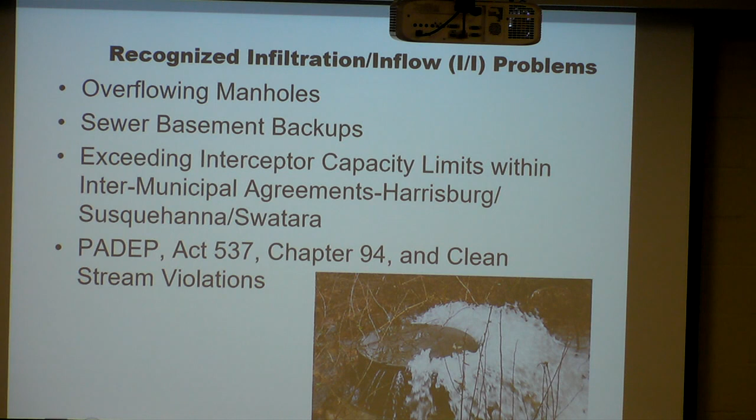A little bit of history: while recognizing the infiltration inflow problems, we first recognized overflowing manholes and sewer basement backups. We exceeded interceptor capacity limits within the intermunicipal agreements for the city of Harrisburg, Susquehanna, and Swatara. At that point PADEP provided notice that we were in violation of Chapter 94 in the Clean Stream laws. This was back in 1995.

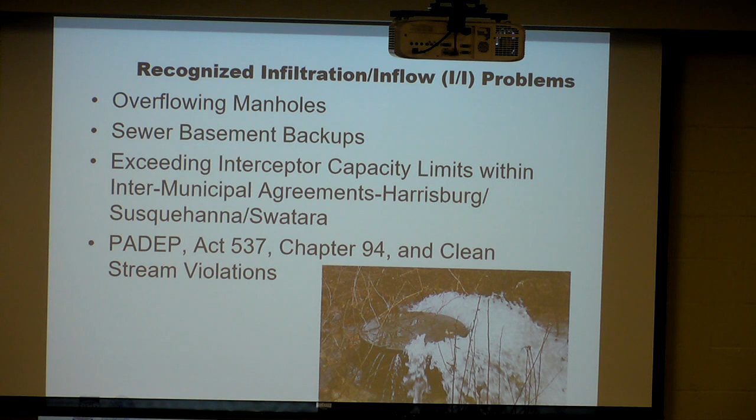So as part of the consent decree, this amendment was done in 2002 for a total replacement program. The program includes replacing all asbestos cement pipe that's reached its useful life from 1972 and clay sanitary sewers that have reached their useful life from the 60s. We also test and replace or repair PVC sewers that fail an air test and are contributing unacceptable amounts of flow, including private sewers. This includes all the project area we're discussing today in PC3E Claremont.

This is the PVC area public meeting. These sewers in PC3E were metered and showed excessive I&I, which is the reason it was included as part of this program.

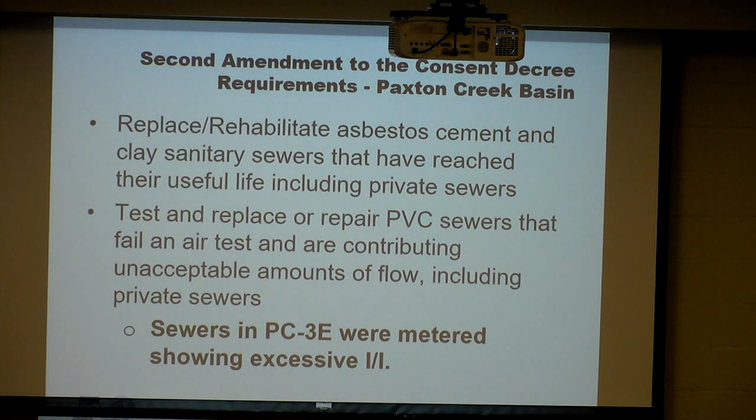So the goal is to eliminate overflows and basement backups by 2022 in Paxton Creek, and we also have to reduce the sewer system hydraulic overload by reducing the flow in the system so that it will properly function without the threat of sewer backups and overflows.

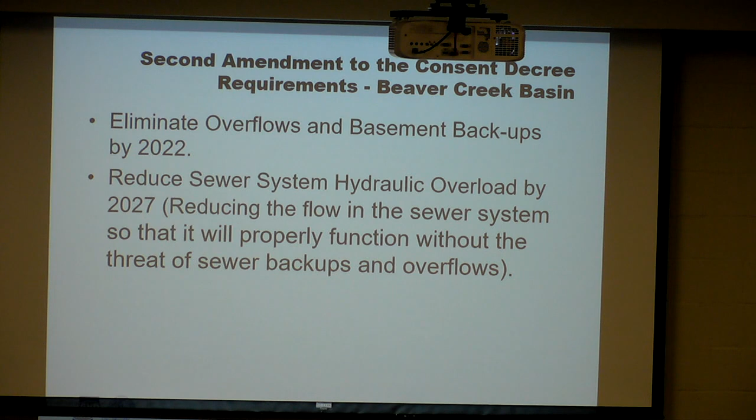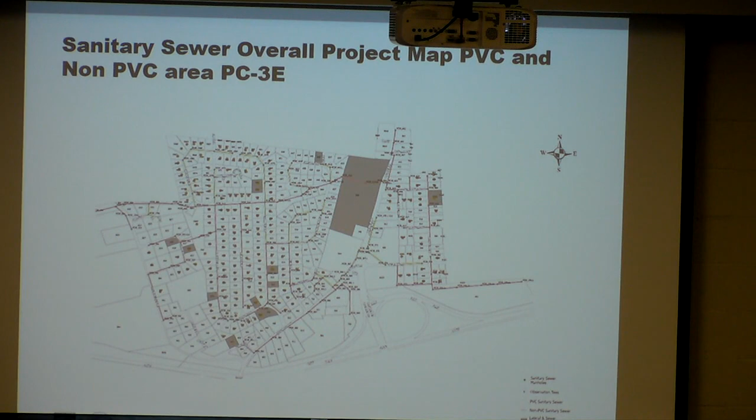This is just an overall map of the project area. For those watching today that haven't been able to attend the public meeting, this is obviously your neighborhood, Claremont. There are 138 homes within the PVC area. This overall map shows all of the PVC and non-PVC areas, with approximately 400 plus homes in this area.

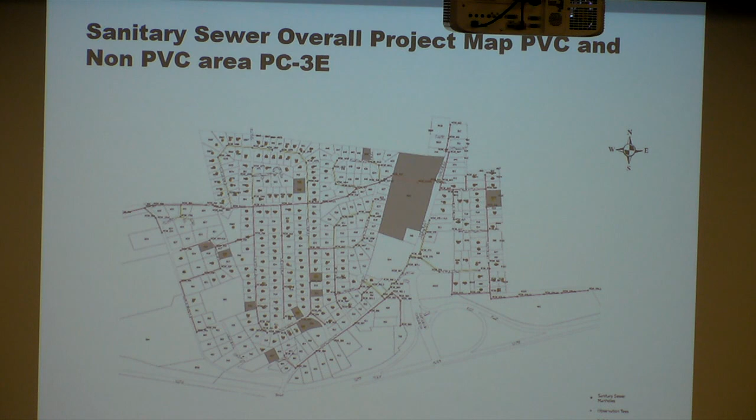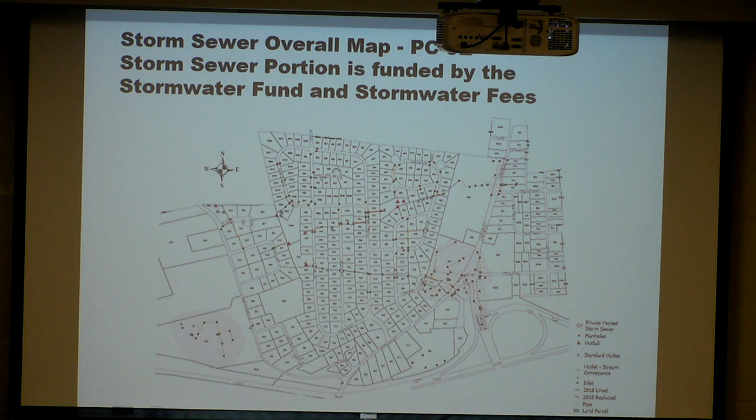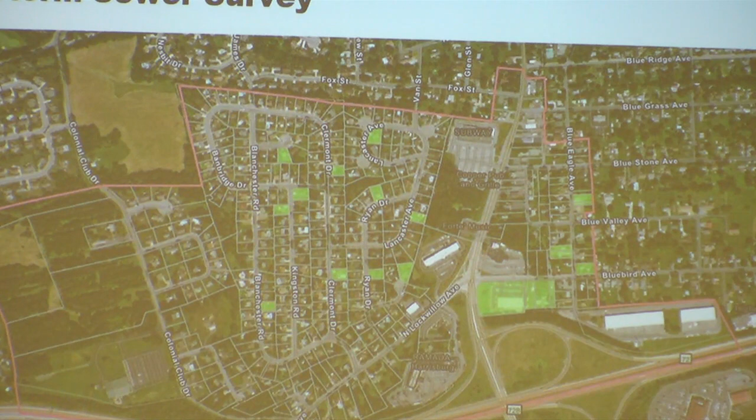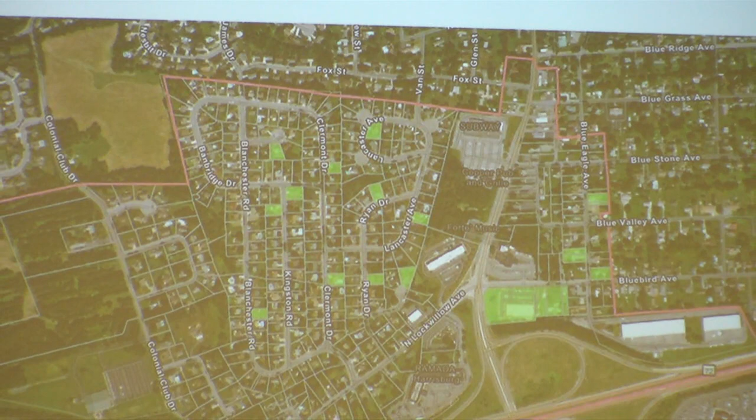John, you want to take these? Sure, Bill. The storm sewer surveys that were sent out are in advance of the private sewer agreement that you received most recently in the mail. To date, we have about 15 returned. We encourage everybody to return them to us, and we will be reviewing them here in the next month and a half to include expanding some of the storm sewer system in areas that we know are having issues as reported by any resident who returns the survey.

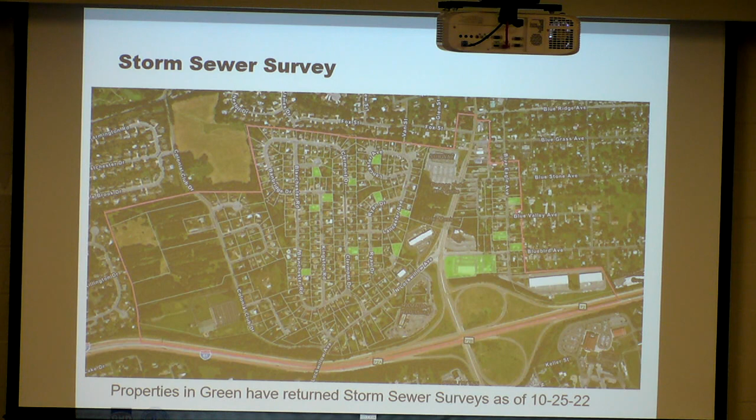This is the map showing all the areas that have returned surveys, highlighted as green properties. We encourage everybody to return them to us via email at mynewsewer.com or in the mail to the address listed on the top of the survey.

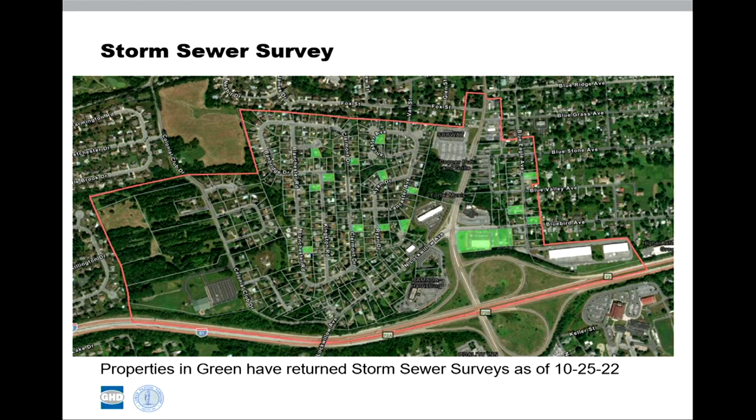A little bit about the project milestones for the public sewer, private sewer, and public storm sewer system: our first milestone is what John just said. We mailed out the storm sewer survey in October. We'd like to get those back in November and start the design of the public sewer and storm sewers.

The design of the project will last all through 2023, and we will bid the project in November 2023, award the project in December 2023, and have a construction meeting in February 2024. In March 2024 we expect construction to begin, and the project will last a year and a half, until the end of 2025.

All storm sewer work for this project will be completed by the Township storm sewer replacement crew, which we started in 2022 and realized a savings per year of $200,000 to $300,000. That crew will start that work in November 2024 and go until the end of 2025. The total project cost, including sewer and stormwater, is approximately $17.2 million.

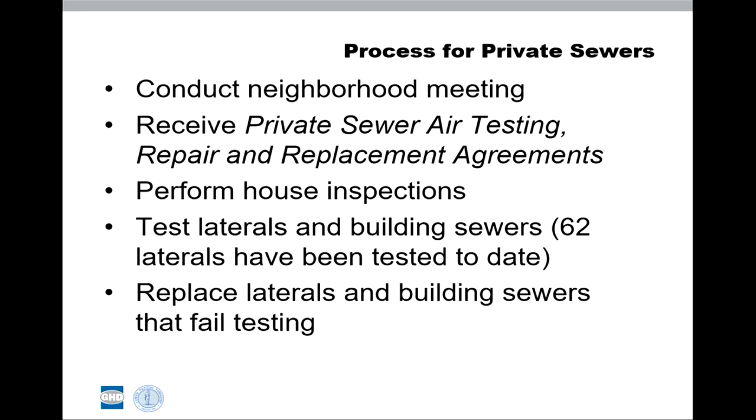Then we replace laterals and building sewers that fail testing. Then we restore areas affected by construction. Yards will be hydroseeded by a subcontractor, and concrete will be repaired by a subcontractor.

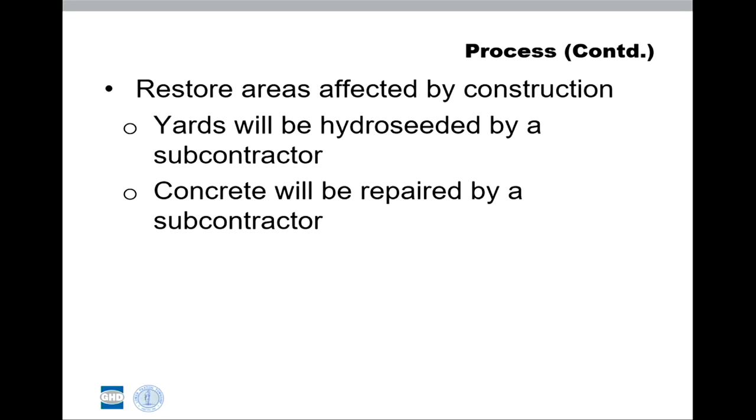More about the schedule milestones: we'd like to get the agreements back between now and November 2022 to January 2023. Building inspections will be done January to March 2023, then a crew - the same crew that does storm sewer work - will come in April 2023 to start testing and replacing private sewers. This is 138 properties. There's 62 that already have a clean out, which I'll show next. That work will take from April to November 2023, with final completion in November 2023.

This is a typical sewer layout we'd like to show. Most folks don't really see the sewer in the ground and don't understand the components. The homeowner's responsibility is everything from the house to the main line in the street. This includes the sewer lateral portion, which goes from the sidewalk to the sewer main.

If you don't have a sidewalk, it's usually the grass area at the edge of paving to the middle of the street - we call that the sewer lateral. The building sewer goes from the house to the sewer lateral. That's typically 4-inch, and the lateral is 6-inch. In between, there's a service connection point we call an observation tee.

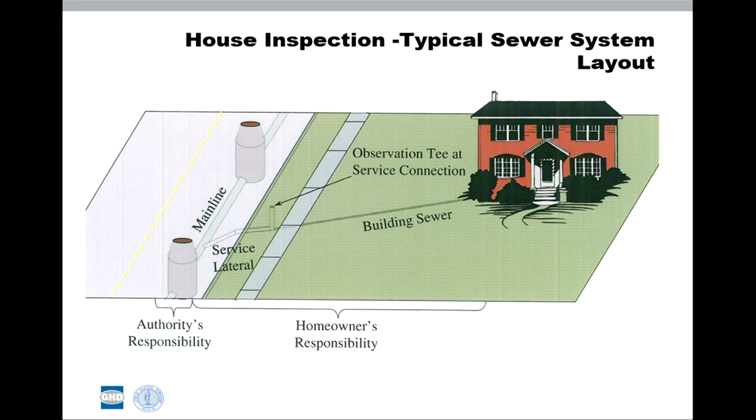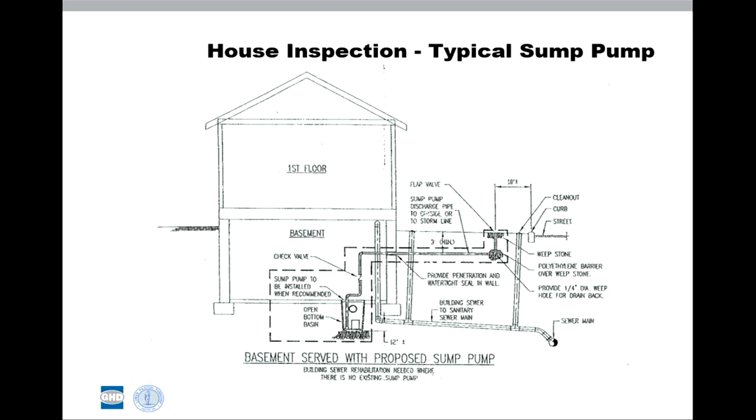As part of the house inspection process we went over earlier, John Dibler will be out to do a house inspection, scheduled either at the public meeting on the 17th, or if you're watching this video, you'll need to call our office to schedule one. This is to make sure you have a typical sump pump with a typical connection that shows it's not connected to the public sewer, but discharges to a weeping area in the yard, into a pervious area, and not into the public sewer or storm sewer system.

So what kind of disruption can be expected during construction on your property? This is the contract spec provided in the contract document - what you can expect if your sewer fails an air test. You'll have your sewer line replaced, and these are the components.

It's pretty straightforward. As I said earlier, the building sewer is 4-inch, and out toward the street there's a T-tail for the lateral, which is 6-inch. We have the observation tee that connects the two with what we call a 6x4 reducer. So this is what to expect if your sewer fails an air test and needs replacement.

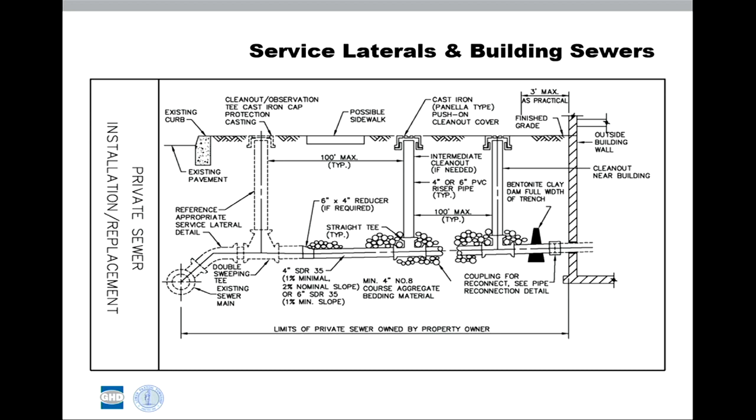We'll talk about air testing now. First, we'll air test the sewer. If you don't have an observation tee, we'll have to install that first, usually between the curb and the sidewalk. If you don't have a curb or sidewalk, it's the edge of paving. They'll put in the observation tee, insert a plug, and insert a plug at the house through the clean out.

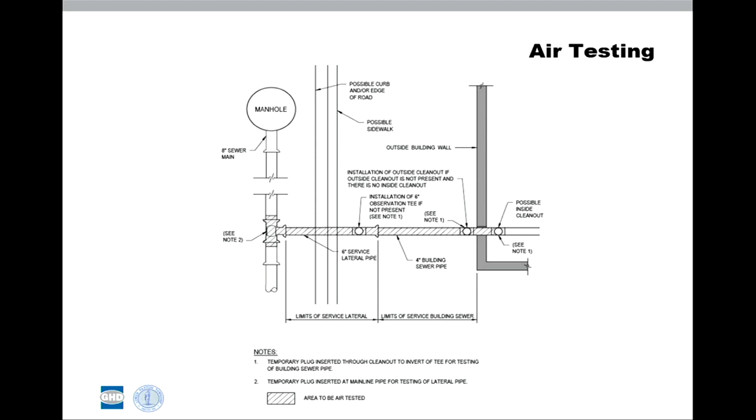So there's a possibility you could have sections of your sewer pass and not be replaced, or you could have both replaced, depending on the testing.

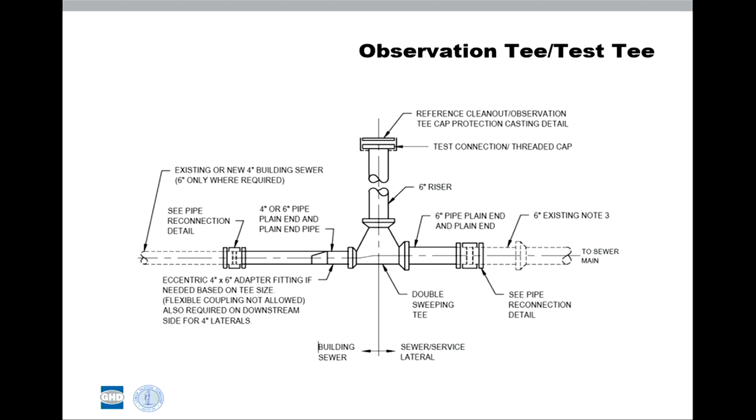This is just a typical spec detail for the observation tee itself. Some of you, if you're lucky, will have the sewer pass for both the lateral and building sewer, and you didn't have an observation tee. This would be the only spec detail given to our folks - just the installation of that connection point - and for testing, it's called the observation test T.

At the observation test T, we put a casting. Some of the older sewers have a PVC clean out that's buried, and if it's not buried, it's often hit by lawnmowers. So we've come up with a typical casting that won't be damaged. It's set at grade when finished.

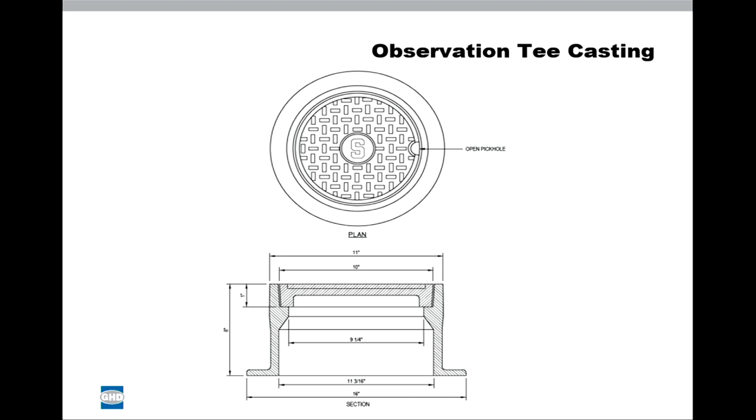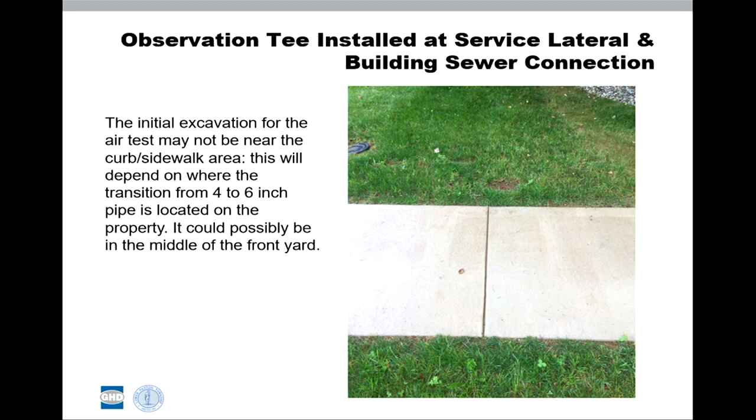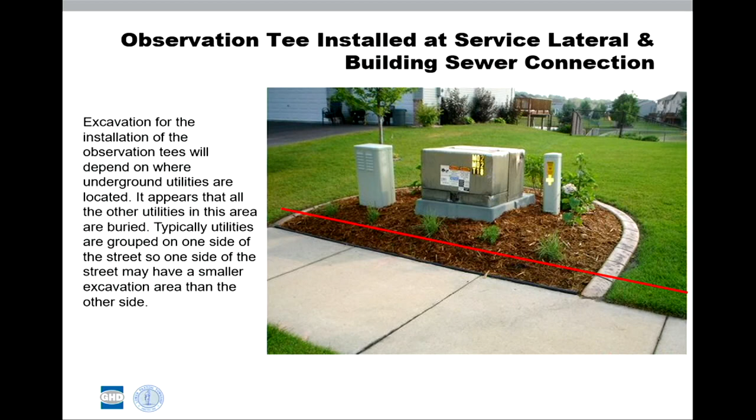This is just to show the excavation for the observation tee, which will depend on where the underground utilities are located. If other utilities are buried in this area, we may have to move the observation tee closer to or away from the house due to conflicts with Verizon, electric, or water. The red line shows where the observation tee should be, but if there are utilities there, we'll move it a couple feet either way.

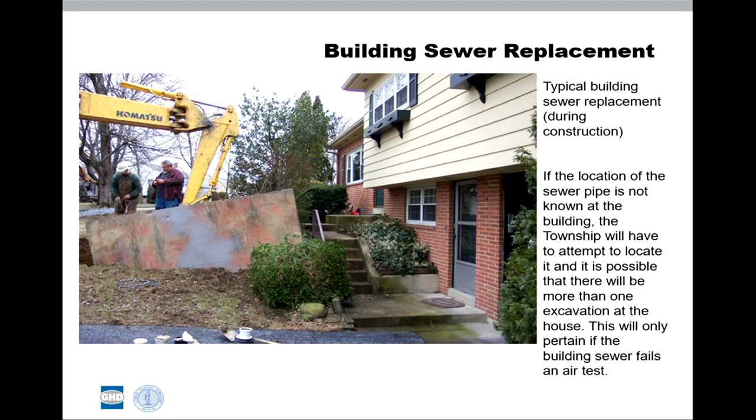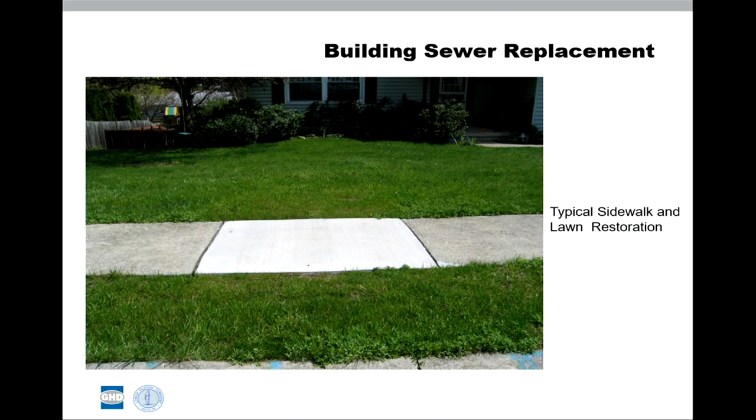This is what it looks like after it's done, but before restoration. This is what it looks like after the building sewer is replaced. We replaced the sidewalk, the lawn has been fertilized and restored.

We have this posted on our webpage as well. We do have a grading and seeding policy, with a one-time seeding. We expect the homeowner to water the lawn after it's been properly restored and fertilized.

There are some recommendations made for the care of the lawn after it's seeded, for weeks 1 through 5, months 1 through 5, etc. Essentially, we just tell people to be patient, because you can't expect your yard to look like the rest of the yard in a few weeks. It does take 6 months to a year to get that lawn reestablished back to its original condition.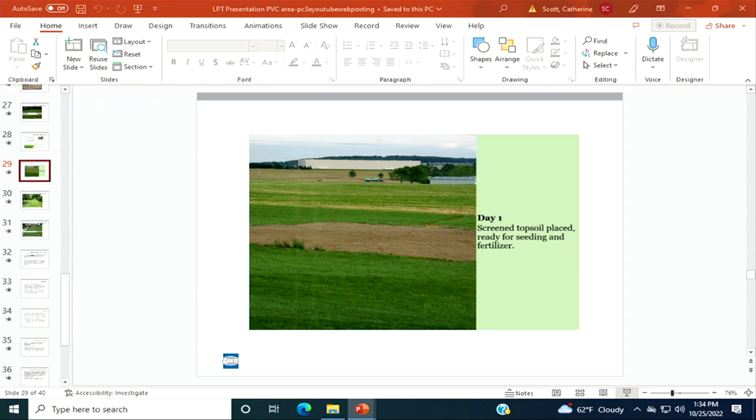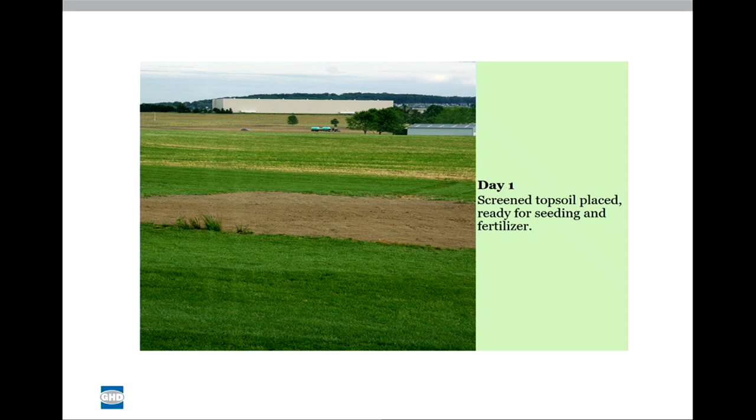So this is what to expect. On day 1, the screened topsoil is placed and ready for seeding and fertilizer. Just a little bit of background on the yard restoration.

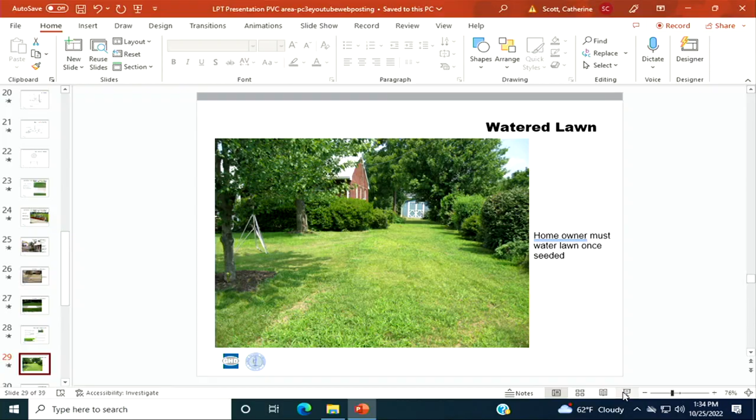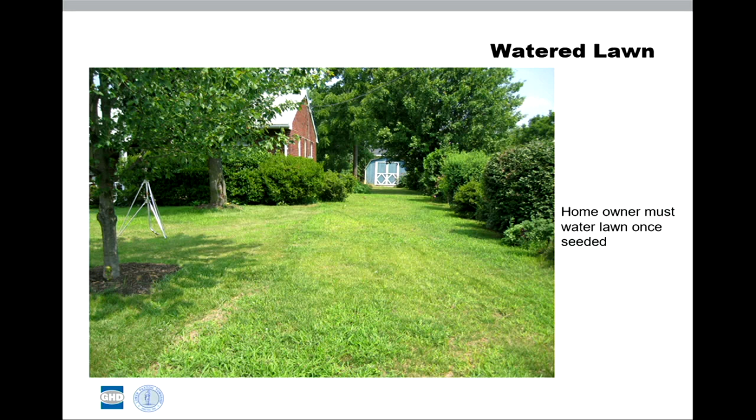So the lawn, after it's watered—again, the homeowner must water the lawn—once seeded, this is typical for what you'll see after the building sewer is replaced. We have very good success with the type of seed and fertilizer we use.

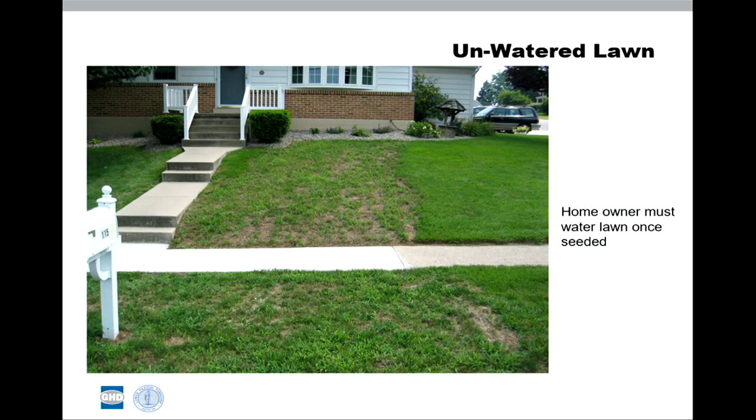This is just an example of what happens when the yard is not watered. The seed can't germinate properly, and you have sparse areas of non-germination.

A little bit more about the project and the sewer replacement. The homeowners can still use their toilets and sinks while their service is being tested or replaced, but they should not use washing machines, dishwashers, and showers during that time. That's heavier water usage, and we don't recommend that.

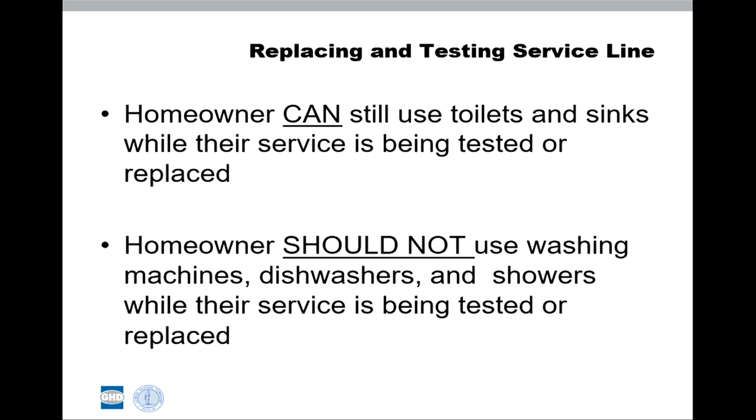A little bit about the agreement: there are obstructions, as provided in the agreement, that are the responsibility of the homeowner. So if you have any affected bushes, flowers, gardens, etc. that you want to preserve, they must be moved by the homeowner prior to construction.

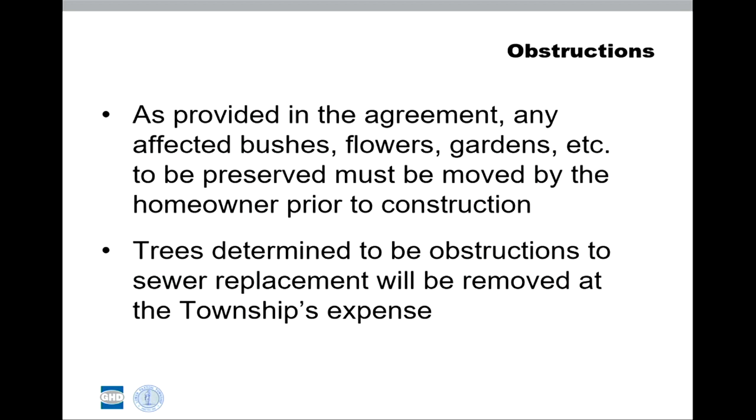Trees determined to be an obstruction to the sewer replacement will be removed at the township's expense. The homeowner will be notified that the tree needs to come down, but they will not have to hire a contractor—that will be at the cost of the township and done by a township contractor.

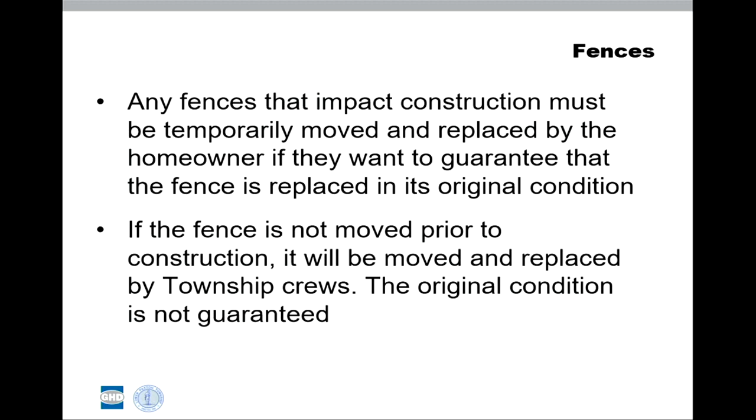Any fences that impact construction must be temporarily moved and replaced by the homeowner if they want to guarantee the fence returns to original condition. If the fence is not moved, it will be moved and replaced by township crews, but we can't always guarantee the original condition—there could be some minor damage during the moving of the fence.

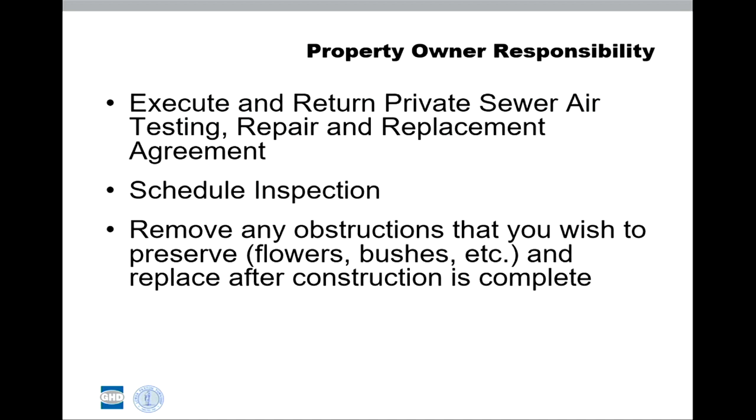So the property owner's responsibilities are: execute and return the agreement, schedule an inspection, remove any obstructions you wish to preserve, and replace them after construction is complete.

Notify the township staff of any underground utilities installed. That could include gas, water, electric for swimming pools, dog fences, water lines for sprinkler systems, and electric for landscape lighting. Water the grass after planting is complete.

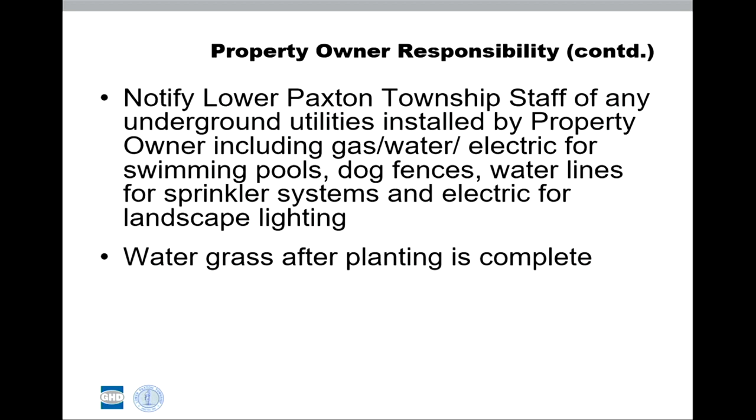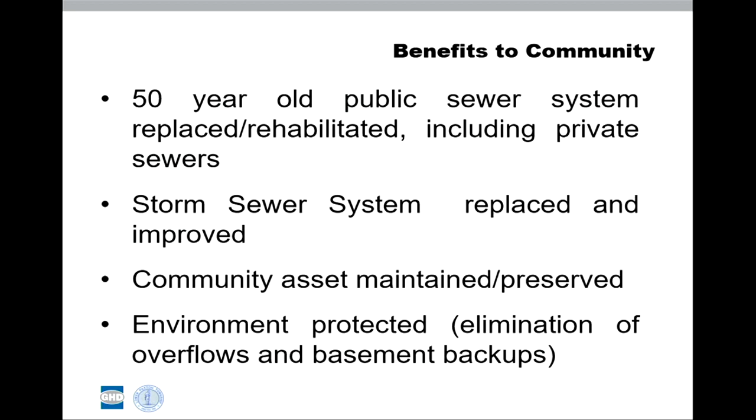So the benefits: you have a 50-year-old public sewer system, including the private sewer, that's been rehabbed or replaced. You have a storm sewer system that's been replaced and improved. This community asset is now maintained and preserved, and the environment is protected as we eliminated overflows and basement backups.

The township will be utilizing the Civic Ready program for public notification. Interested homeowners must provide a cell phone number or email address, which will sign you up for a mass notification system and emergency alerts.

Also, you can visit the township's sewer and stormwater project website to stay updated on the project and sign up to receive project updates via email or mobile app.

Thank you. For questions on your private sewer agreement, you can email us at the new sewer address or call the office, and we'll be happy to answer any questions on the private sewer replacement agreement. It's a standard agreement we've used for the last 20 years, drafted by our solicitor, and it's pretty straightforward, but we'll be happy to answer any questions you have. That concludes our presentation. Thank you.